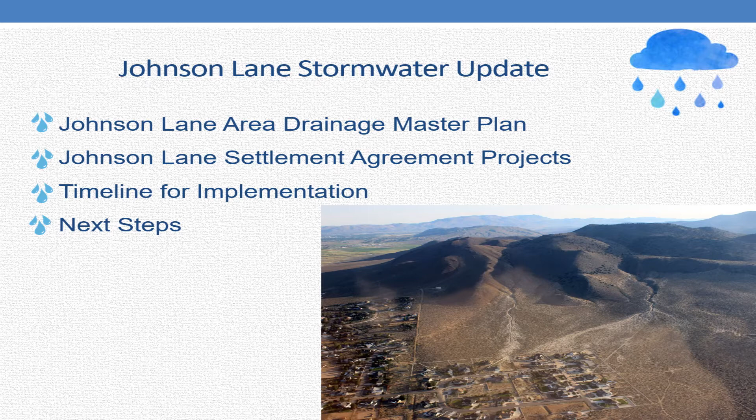There was litigation against Douglas County by some residents in the area, so I'll give an update on what came out of that. I'll also talk a little about the timeline for implementation of the drainage master plan, and some next steps beyond the litigation and that implementation.

For those of you not very familiar with the Johnson Lane area, there are several water courses that flow through the developed area. There are 12 different washes that flow through, so you can imagine it's a bit of a challenge to deal with all the runoff once it gets into the developed area.

This was the first thing our consultants, J.E. Fuller, looked into - identifying all the different water courses that flow through the subdivision. Next we'll get to the amount of flows they carry and what types of alternatives could be implemented.

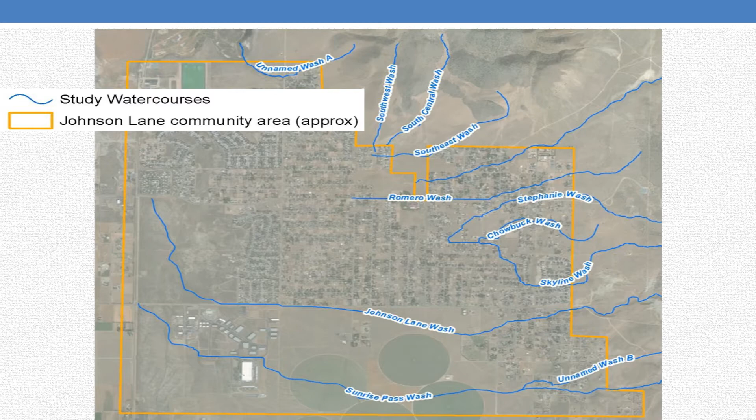Here's a few of the issues that were occurring. We had roads washing out, a couple feet of water in roadways. A few homes were damaged by floodwaters, and several homes with landscaping were just covered in sediment, mud, water, etc.

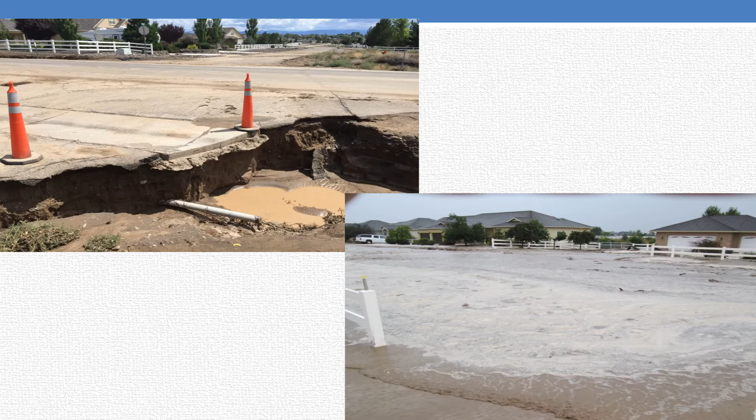Here's the Johnson Lane Area Drainage Master Plan recommendations. They essentially broke up the water flow and the different washes that flow through the area into 4 different main systems - 5 really if you count the unnamed Wash A. So there are 5 different systems, and what we're going to focus on for most of this presentation is this area in purple, called the Pine Nut North system.

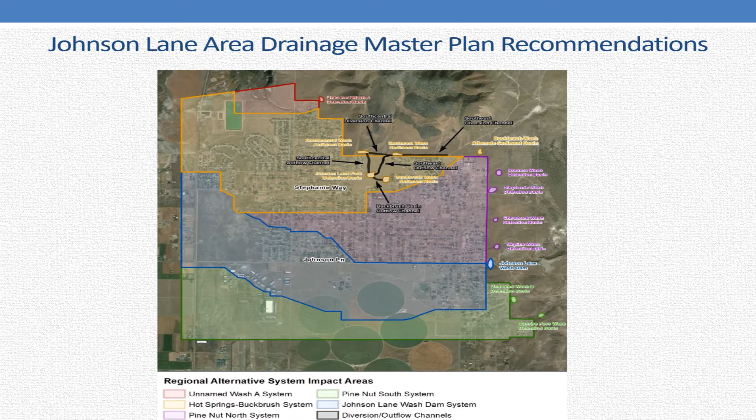In these 5 different systems, they conducted a prioritization of which ones to do first. There's a lot of recommendations in the plan, so you want to figure out where you get your most bang for the buck - where you help the most amount of people for the least amount of money. If you look at it like that, the Pine Nut North system is the highest priority because it protects the second largest number of buildings at a lower cost than Hot Springs Buckbrush.

The Hot Springs Buckbrush system helps the most amount of people, although it is quite expensive. The second priority they put down was a dam for the Johnson Lane Wash. We'll talk in a minute about how that may not be the second highest priority for Douglas County.

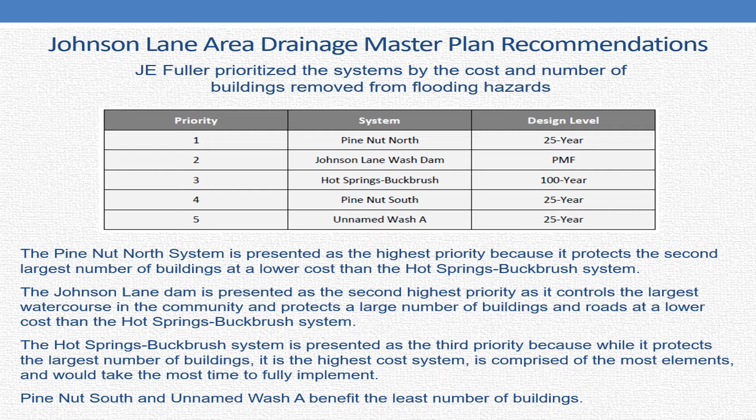The Hot Springs Buckbrush system is the third priority. It does protect the largest number of buildings, however it is the most expensive to implement. Pine Nut South and unnamed Wash A benefit the least number of buildings, but there is some benefit to doing them at some point in time.

Here's kind of the price tags we're looking at. For the Hot Springs Buckbrush system, it's about $8 million. For the Pine Nut North system, it's $880,000, somewhat obtainable for those 4 basins. The Johnson Lane Wash Dam is $4.9 million.

However, we would prefer to not put that as the second priority because all of these improvements will ultimately be constructed on BLM land, and getting the environmental approvals to build a dam on BLM land will be very challenging. We're actually not even sure if that will ever be feasible to be approved on their property.

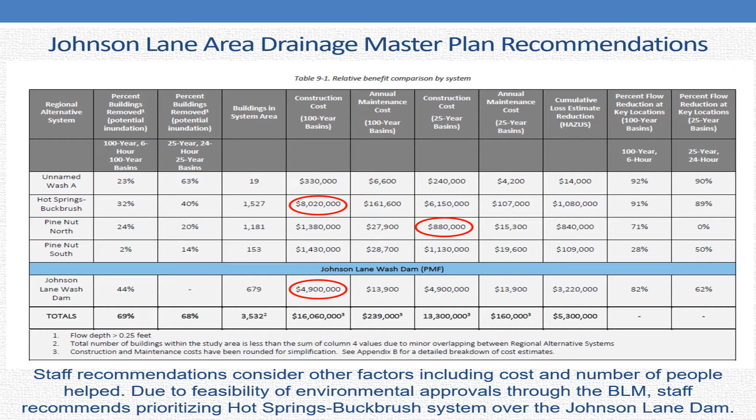So just to break out the costs, it helps to look at each system's individual components so you can figure out trying to bite off sizable chunks. When you look at $8 million or $1 million or $4 million, it looks pretty unobtainable. But if you can break them out into each detention basin or each system, then it starts to look like something you might be able to wrap your mind around finding the money to do.

So the Pine Nut North here - they recommend that we do the 25-year systems, so you can see the 4 basins broken out there. And then the Hot Springs Buckbrush systems, those are a little bit more expensive, and they do function as a system, so that will be something we look into in the future.

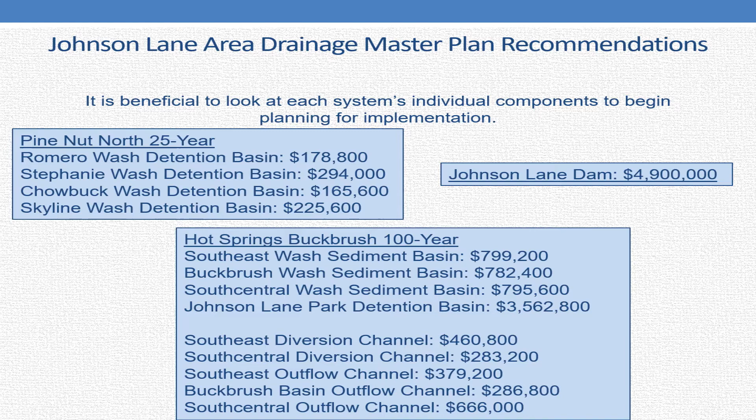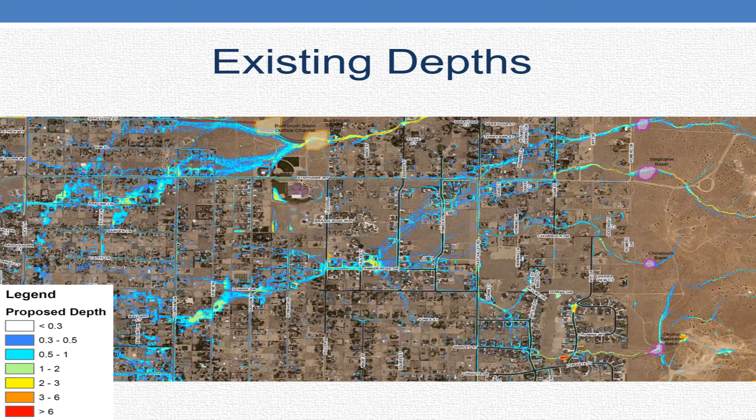So we're going to go into the Johnson Lane flood litigation settlement project. As I mentioned earlier, there was litigation against Douglas County. A group of 30 homeowners got together and formed a lawsuit against the county. It was just recently settled last summer, in 2020, or maybe it was 2019. It's been a long process.

As part of the settlement agreement, you'll see the Romero Wash Detention Basin and the Stephanie Wash Detention Basin are mandated by Douglas County to construct. Those improvements are both planned to be on BLM land.

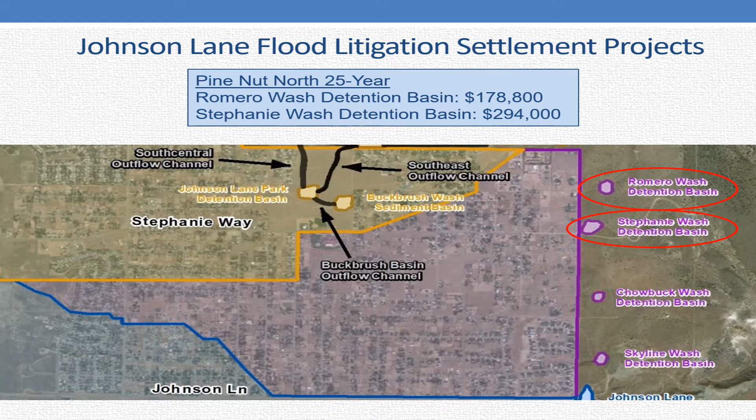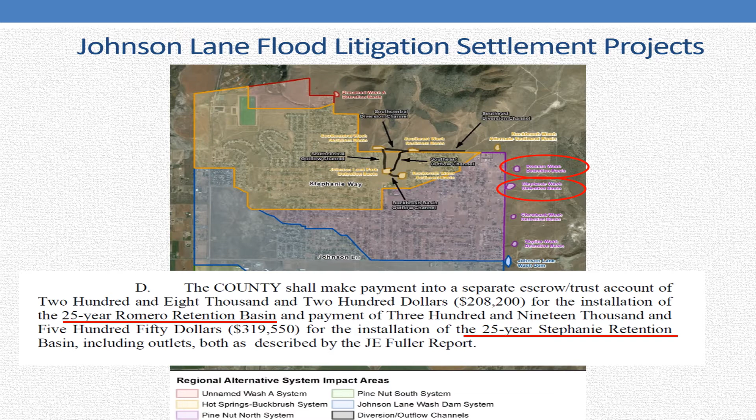Here's where it shows in the settlement agreement that the county will set aside the money for the installation of the 25-year Romero Retention Basin and the 25-year Stephanie Retention Basin. We do have 15% design plans for each basin, so we know relatively well where they're going to be, what they're going to look like, and we have an idea of the actual footprints. We just know these will change as we get into the 100% design, and I'll explain that a little more in a minute.

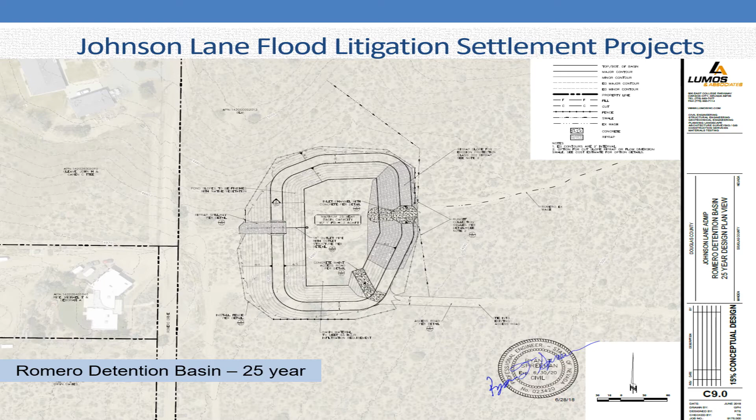In addition to the county being required to construct the Stephanie and Romero detention basins, the county also needed to set aside $302,250 into a separate account. This would be used for projects that the plaintiffs could request outside of the J.E. Fuller Drainage Master Plan, or within the Drainage Master Plan, as long as it showed a regional flood protection benefit to the Johnson Lane area. Basically, they didn't want to commit all their funds into the Drainage Master Plan because they believe there are other projects in the neighborhood that would benefit them in addition to the Drainage Master Plan that was conducted.

I didn't know much about their ideas for this extra account of $300,000 until one of the plaintiffs submitted a project to be considered for these funds. We had a court hearing, and I reviewed their proposal. Essentially they were asking if we could install an Arizona crossing, basically large box culverts, connecting the street with their 2 driveways. Or they were asking if we could install a very large culvert to replace the one in their main driveway and then install an Arizona wash at the second driveway.

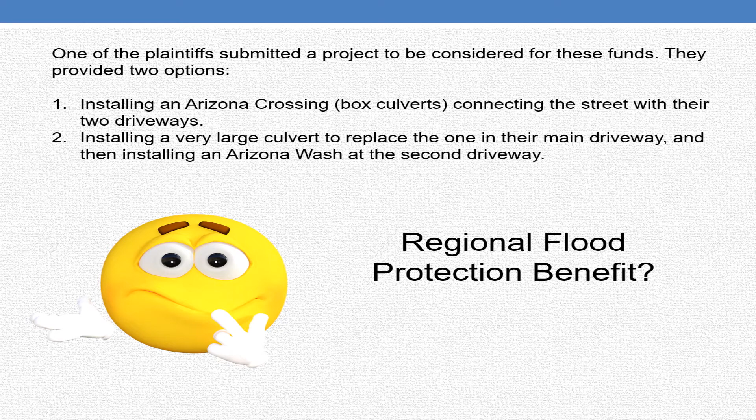As I reviewed their proposal, I'm thinking, okay, these funds may be spent for projects that can show a regional flood protection benefit, but I couldn't quite see how it would help more additional homeowners than just the ones requesting this project. That led me to having several meetings and discussions with the plaintiffs, trying to work through some of these issues. So I want to go into a little bit of what we came up with.

In our negotiations with the plaintiffs, I really needed to hear their opinions on what they thought the plan would do and what it would not do. When the consultants were putting together the plan, they were directed to provide any improvements that could be constructed on public land, because that's probably going to be feasible. If you propose something on private land, the current owner may not want to sell, and the project may not be feasible based on land ownership. So everything was based essentially on BLM land, which helps immensely because it gets all the runoff in these washes and traps it upstream of the subdivision, helping a very big problem. However, there are additional runoff areas generated by the developed area that could also be causing additional issues in the neighborhood, and those were some of the discussions we had.

I did get the plaintiffs to compromise a bit, dedicating $200,000 of that $300,000 pot of funds to complete the Pine Nut North system. So in addition to installing the Romero Wash Detention Basin and the Stephanie Wash Detention Basin, we will also make a good faith effort to dedicate $200,000 to the Chowbuck Wash Detention Basin as well as the Skyline Wash Detention Basin, and the county will make a good faith effort to come up with the additional funds needed to install those two additional basins.

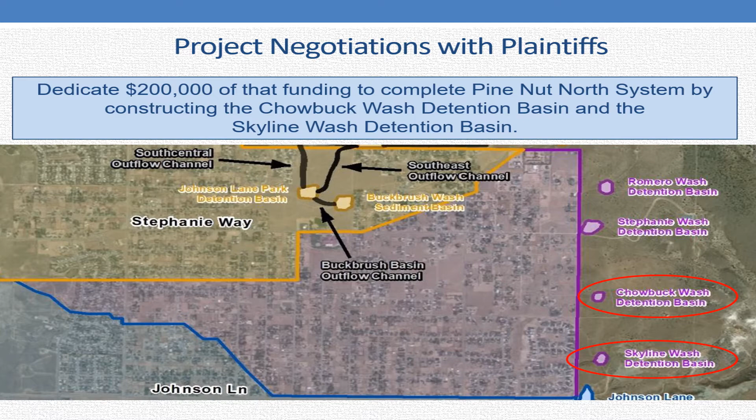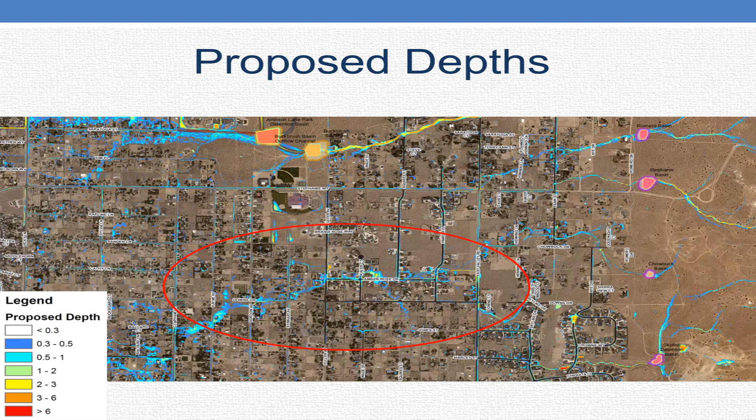contain the upstream runoff from above the developed area. I'm just going to zoom in a little bit more here so that you can see some of the impacts that are still occurring even after you put in those detention basins.

And that's really the biggest concern. Is this going to fix everything? No, it's not going to fix everything. So are there additional projects that we should consider and that we should talk about?

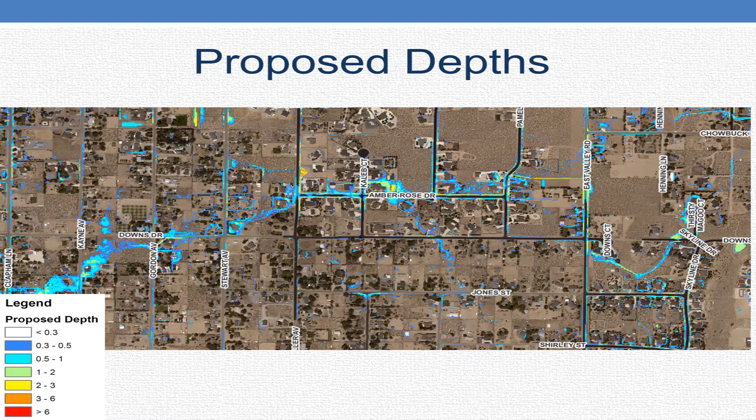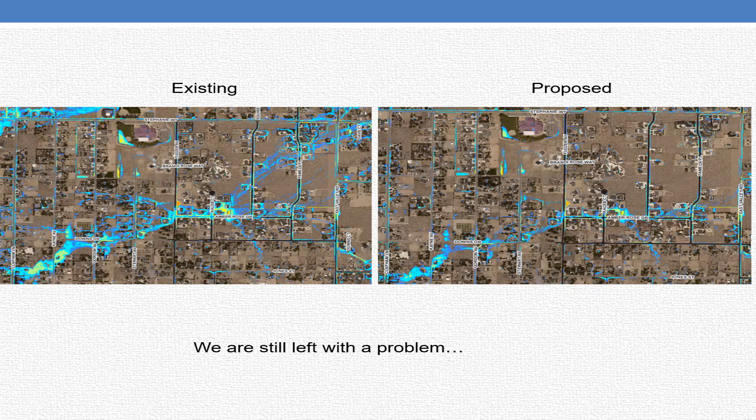So in the negotiations with the plaintiffs, we basically decided that Douglas County will use reasonable efforts to identify a 1-acre parcel somewhere within the area of Pamela Place, East Valley, Amber Rose, etc., to contain some of the runoff you saw in the previous slide. And with that 1-acre parcel, we would then construct a detention basin to retain that stormwater runoff.

So this has kind of been a long-standing problem, and I agree with them through our talks that I could understand where they're coming from, that although it is of great benefit to install the upstream basins, it will also be of great benefit to try to identify a parcel within the subdivision where we can contain existing flows from the developed area. So that is what we're going to work towards doing, and I'll be happy to provide an update on that in a year or two when we get rolling with that.

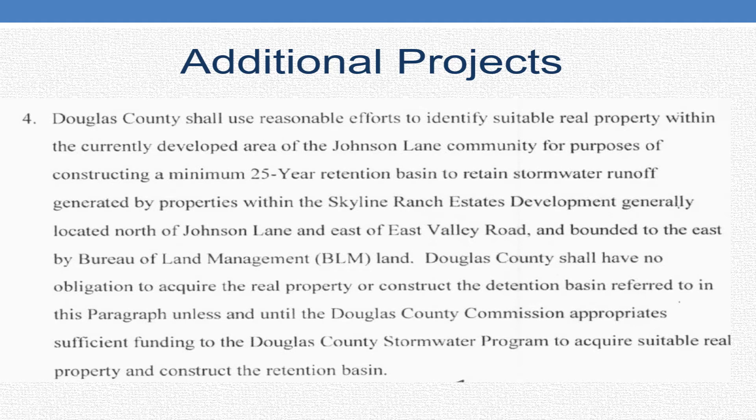So I wanted to kind of give you a timeline on where we're at today. So far, we are working with BLM to be able to get their approval to construct these basins on their land. So the first step was to apply for a right-of-way, which was done in October of 2019.

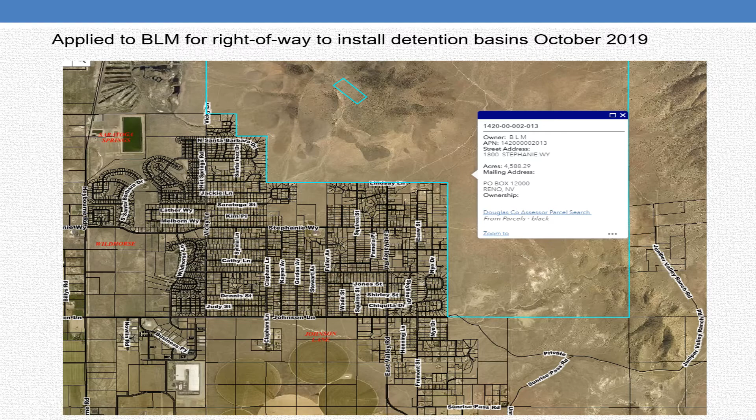As of right now, we're going through the NEPA process to complete an environmental assessment. We're hopeful that that will be completed by the spring of 2022. And per the settlement agreement, once we have the approval from BLM to be able to construct the improvements on their land, we have 9 months from that date to actually get them constructed.

So once they give us the green light, we have a contract in place with Loomis and Associates to bring the plans for those 4 basins that we're going to be installing from 15% design up to 100% design. And then once we have the design and we can put everything out for bid, then we're hoping in the summer or fall of 2022 to construct all 4 detention basins using the same contractor.

And then ongoing, we will continue to make good faith efforts for a drainage easement and acquiring that parcel for the 1 acre detention basin. So that will kind of be our next step after that. However, after we're done satisfying the settlement agreement, our work is not complete. There's still other areas of Johnson Lane and other recommendations that were in the plan.

So I just wanted to go through really quickly our next steps for implementation after the settlement agreement and proposed order are completed. Trying to do some long-term planning.

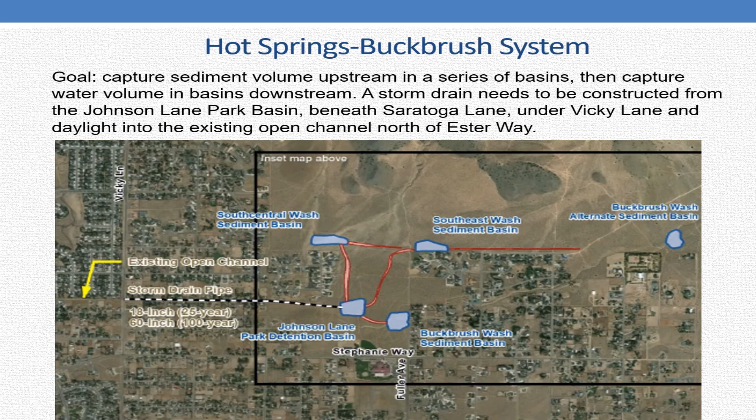So basically, we have obtained the drainage easement from this existing open channel in Saratoga Springs. And so once all the hot springs buckbrush system is in, it will go through a storm drain pipe and ultimately be discharged to that ditch. And then Douglas County will be in control and have maintenance responsibilities over the entire system.

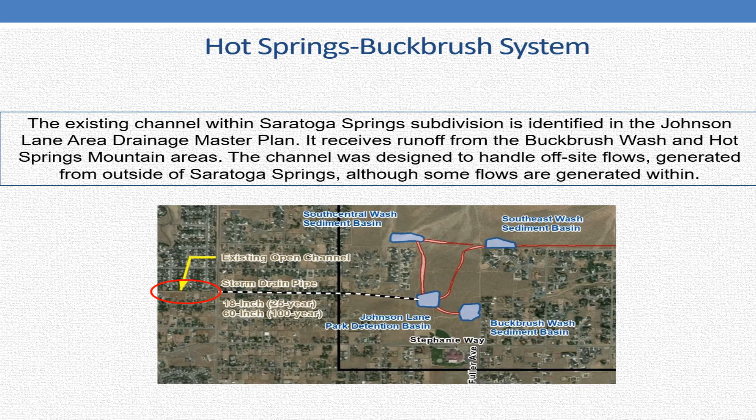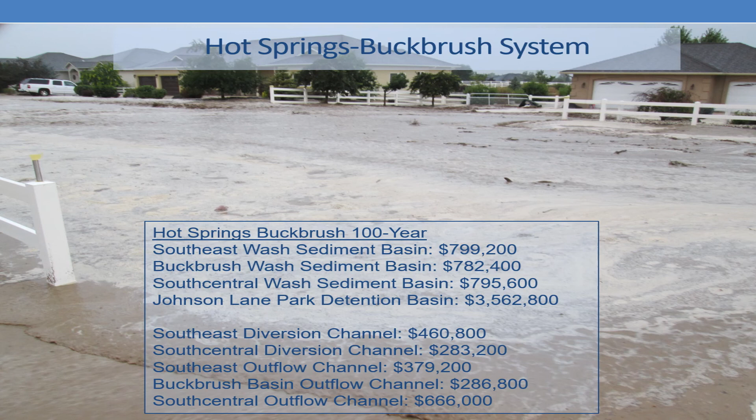This is probably realistically in our 20-year plan to have all of these things completed. Here's the price tag again for each one of these systems, quite high. So we really want to know, if we can knock out one a year or one every 2 years, then we have a shot at getting ahead of some of these things.